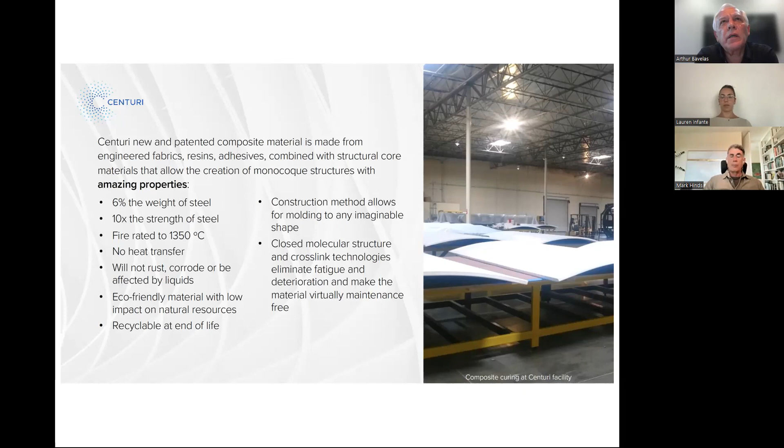Yeah, so in a container, for example, you could have an electric motor generating a lot of heat, and you could have it within the container of this, and it wouldn't melt or burn or be hot on the outside. That's correct. Yeah, super interesting. Yep. Thank you.

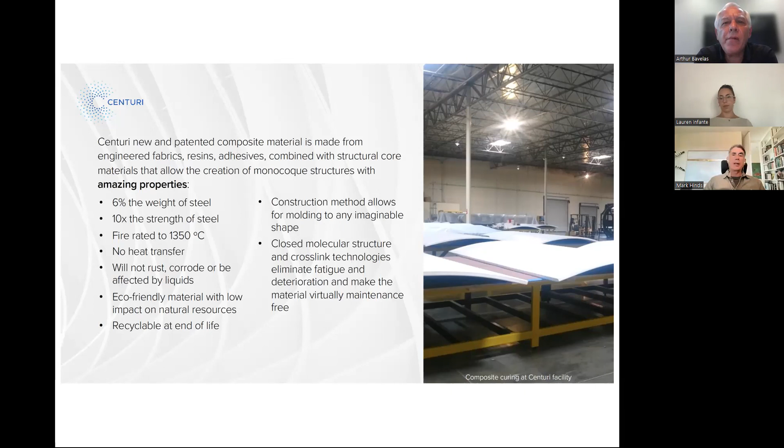Okay, and although we have many, many potential applications, I don't know who's on the call in your background, but I've been working with these really extraordinary minds and helping develop technologies for almost the last 20 years in various applications. And the number one challenge is always, we can keep inventing, but unless we really focus and get something to market, then it doesn't make a whole lot of sense.

So although here we list 4 things, right now we're really focused on 3: the wind turbines, the housing, and the construction. We have a lot of interest in the marine, but it just takes a lot more energy and resources. So we're going to do that a little bit later, but you'll kind of see as we go. I just realized that this may not be fully embedded in here, but maybe when we're done with the PDF, I'll load this wind turbine in a video so that you can see it actually working. So this is really a pretty extraordinary technology. So this is our wind turbine.

It's a little difficult to see in this image, and it's making me think that we should probably do a 3D cutaway. Just thought of that. But what you see is that there's that middle part, which has the skeleton in it, and that's sitting in a ring at the top and then a ring on the bottom. And then the top and the bottom both have electromagnets and coils in them.

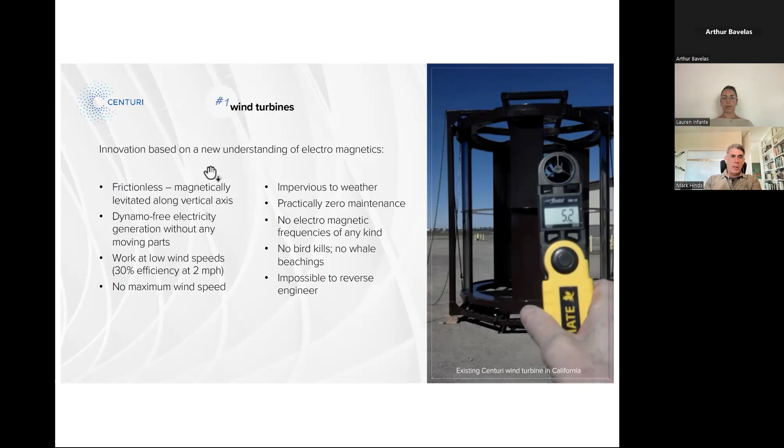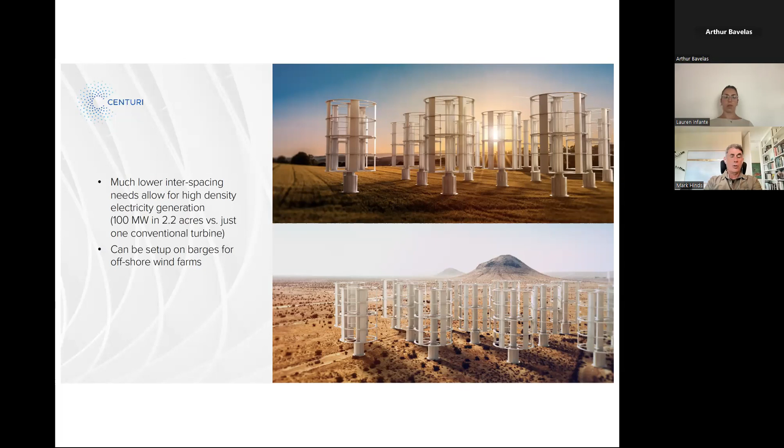Now, these are all artist renderings. This has not been built, but I think I shared a little bit earlier that the density of this is just radically different than anything that's been done before. In 2.2 acres, we could have 100 megawatts. And also interesting, since there's no metal, there's nothing to corrode, there's no moving parts, it's the perfect one for oceans. There's no back EMF, so it doesn't harm the whales. It could be put on barges, offshore. It really completely changes everything that we understand about the potentiality of wind as an energy source. So, yeah.

And I'm going to go through this super quick on number 2. I'm not going to spend a lot of time on it. But importantly, the one thing I did want to show is that was an 82-foot all composite commercial catamaran. We built that fully to basically show how the composite could work in the harshest environment in the world, which is an ocean. And you can kind of see how insanely light it is. In the bottom right-hand side, you've got one little crane holding up the entire vessel.

We've also built a couple things that I can't share a whole lot about with a government agency with the composite and an ocean-going vessel. We have a huge demand for it, but it just takes massive amounts of floor space. In regards to how fast we can do it, we're focusing on the other three first, but just to show some things that we've already built out of the composite.

And so this is the other thing that we're focusing on, which is the composite used for a shipping container. So we've built a 20-foot and 40-foot shipping container, and we've had it tested. And they do what's called a drop test from 4 feet, 6 feet, and 10 feet, and basically no damage.

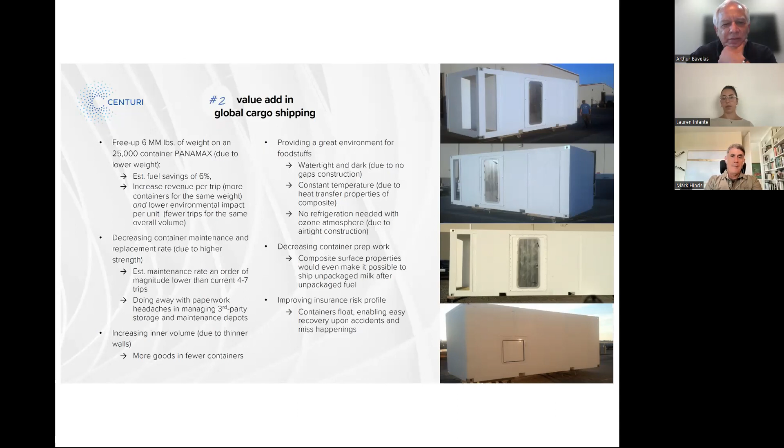Yeah, it's fascinating. There's only a couple people in the world that make those little things, and every one of them has a number stamped on it, and it's registered, and it's insured by Lloyd's. So as you can imagine, it's a bit of a process going through that. But yeah, sure. So that's the shipping container.

And then the third is housing. So that's the house that we built in the bottom left-hand corner, and then in the middle of the right-hand corner. And you can see how light it is, that a little crane is lifting the whole house. I think it took us 2 hours to set the house up. So it got set on the piers, we bolted it in. And then I think one thing that's pretty cool to witness here is that on the second image, on the left-hand side, all of the white things we bought from a vendor, but the flooring, the walls, all of that is the composite material.

So the composite can be made to look like anything, just depending on the texture of the form. It can look like wood, it can look like brick, it can be smooth, like if we want it for a ship or a shipping container. So we can have the material look like anything, and then we can include a color or a paint in the resin, and so basically it would never have to be painted for probably 40 or 50 years. So that bottom left-hand corner, it looks like wood, but it's our composite with a particular texture and a particular color.

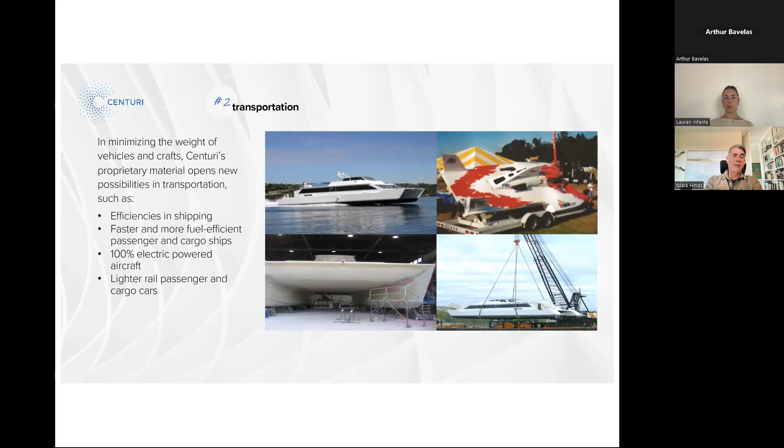We're pretty sure it's the best material on planet Earth by a very, very large margin to build houses from. And one thing I probably should have mentioned, going back up real quick to the transportation, which is one of the reasons that we're getting massive amounts of interest, is that we can also make the hull anti-fouling. I did not know this until about a year ago, but all the fouling material that builds up on hulls of very large ships is one of the biggest environmental challenges there is, and also significantly decreases fuel efficiency. So that's the kind of things that we can do with the composite.

So of course, the house is pretty much fireproof, and it can be brought in one piece, put on either a flat platform or, like that little hillside, on piers, and it's put together in hours. That's the house that we've built, and we have a very significant amount of interest for it. We've actually designed a little part that would go on the back of the house, where we could have the inverter and everything in a little module, so it could be completely self-contained, also from a smaller turbine. You of course wouldn't need a megawatt for that. You need maybe 10 kW. So that's the tiny home.

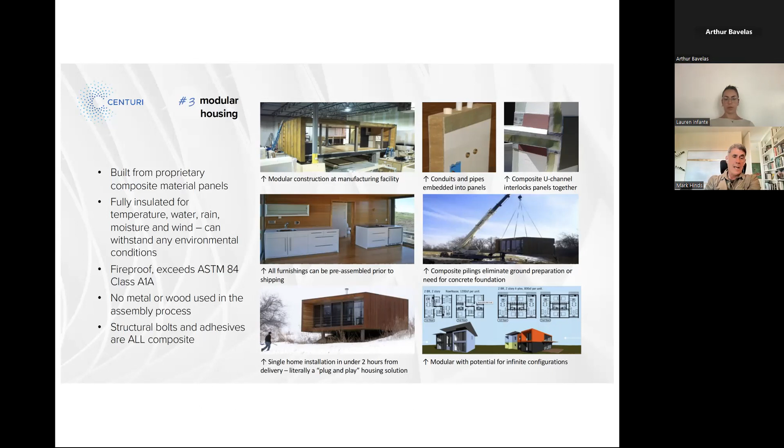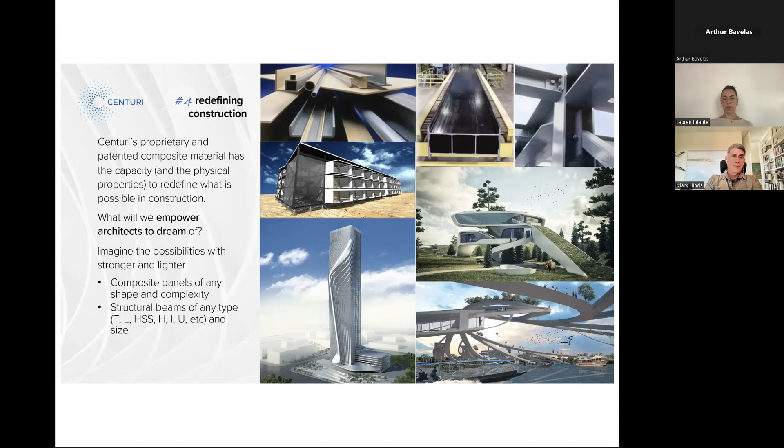And then the last application of this is actually in construction and building materials. Much of this is artist renderings, but the top images, the one in the middle with the little squares, that's actually a truss for a 40-foot bridge span that we recently built. If any engineers on the call looked at that, they'd go, that's impossible that you would have something that thin that would be certified to build a bridge from. And then also on this, let me see, is it on here? Oh yeah, we do.

So probably most everybody's aware that a couple of years ago, Australia had millions of acres burned from these fires that went everywhere. And so we joint ventured with a company out of Brisbane called King Composites. That's what we named it. And so we're now replacing millions of acres of fencing and gates and everything with the composite. Here's a good example. We're putting a yellow color in it so it can be seen. But it's non-conductive, so we can make it electric. It can't burn. There's a pretty cool video on King Composites, folks.

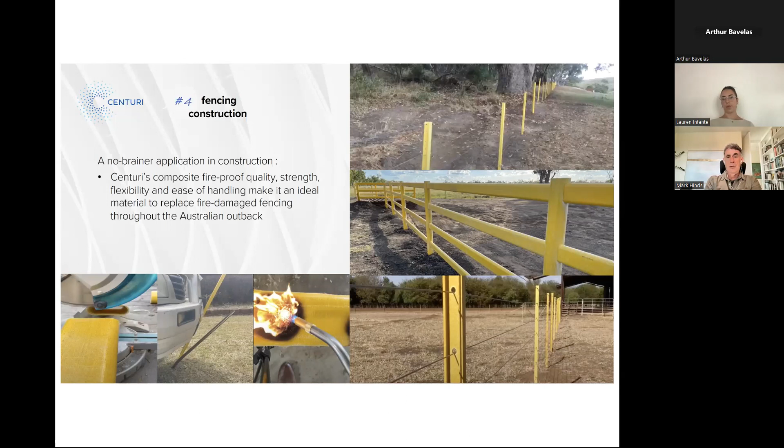But now this has brought us to the attention of many people in Australia, including the government, whereby they are just writing some rules that any new wind technology would have to be manufactured and deployed such as ours, with no transmissions, low maintenance, all of that. So Australia is going to become a very big market for us for many reasons. And now there's a pretty significant chain of hardware stores that want us to start making 2x4s, 4x4s, 1x4s, because it's better than wood and better than steel as a construction material. So that's happening right now in Australia, and that's showing the material being implemented.

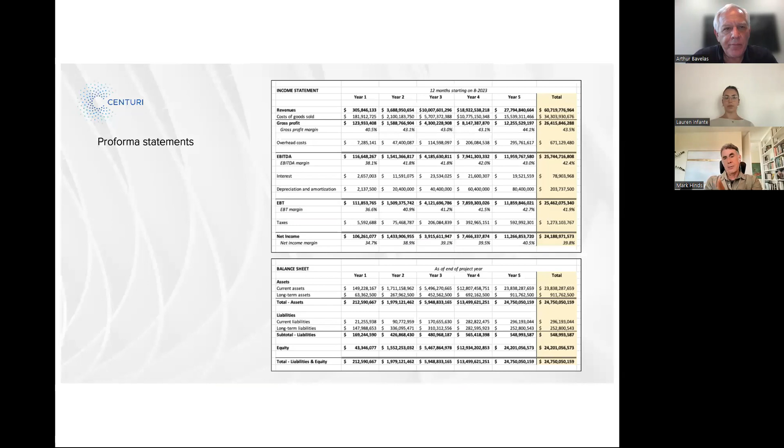And as it relates to the tiny home, I think this was a sample home that you built as opposed to taking orders for them now. Is that correct? Or are you taking orders? No, that's correct. We have interest. We haven't taken orders because we don't know for sure the exact final price. We know what the one we built cost us, but everybody coming to us would like a house that's about 250 square feet larger. So once we build it, we'll be able to tell people, here's the price, and then we can begin taking orders. The containers, we know the price. The turbine, we know the price. But on the house, we don't know the finished price yet. We have a rough idea, but we have to do a little bit more.

Got it. There's a question about the fencing. Is the composite fencing plant in Australia or here? It's not in either.

We've recently, I don't know if I have the little thing here. It's in Chinese, so I don't know if it matters anyways. But we recently received our certification, and I think you pronounce it Hainan, which is the trade-free port in China.

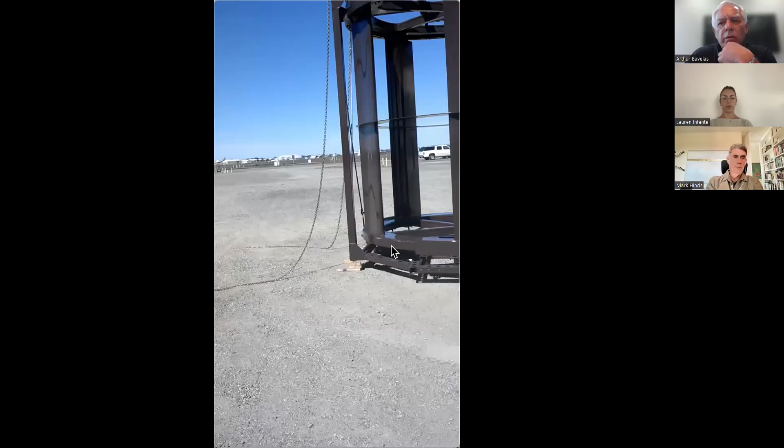So one last question. Does the material have any outgas? Oh, no, zero. No VOCs. Super interesting. Are you going to play this?

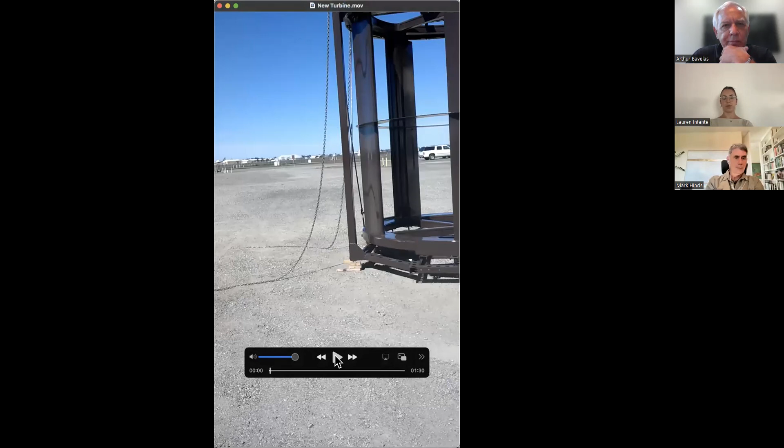Yeah. So here's the turbine. So again, the handheld device is a wind speed meter, and I think you'll see it goes all the way down to about 2 point something miles per hour up to about 14. And you'll see, I don't know if there's a lag time, hopefully not, but it's spinning at about 45, 50 miles per hour, which normal physics doesn't add up. But there you go.

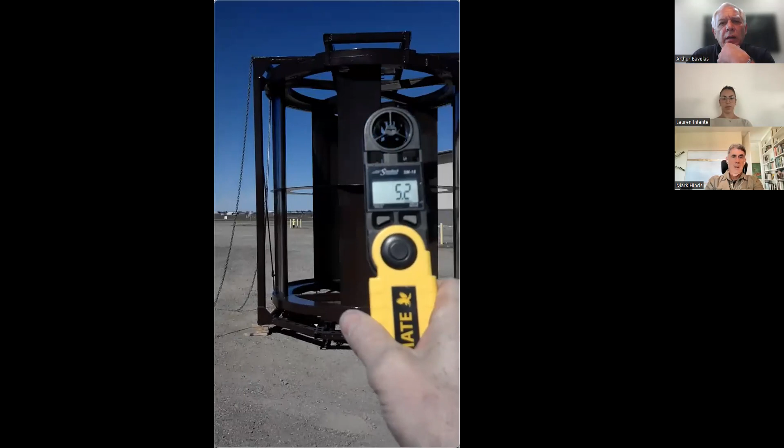So you can see you've got a turbine with a top ring and a bottom ring that is magnetically levitated inside of those. So there's no bearings. There's nothing to ever maintain. There's nothing to ever break down. And the 1.1 megawatt unit would just be about 10 feet taller than that and about 4 feet bigger in diameter. I'm sorry, you've got pricing on this at some point, right? Oh yeah.

So let's talk about the ask and the use of funds. Yeah. So what we know that we need to fully ramp up, two things. One is to finish our first facility, which allows all of the POCs to be done, all the proof of concepts. For that, we've designated a place in Ventura County, California, we have a building that we'd like to obtain as soon as possible.

In that, we'll build the 20-foot, 40-foot shipping containers, the 1.1 megawatt unit with the pole for the 2.2, and then the 840 square foot home. And then we have 2 potential locations, one in Las Vegas and one in Reno, where we can scale manufacturing. So for all of that, which would include the building purchase in Ventura, building leasing in the other 2 locations, and then equipment, inventory, and all of that, anywhere between about 26 to 30 million.

And so that's the ask, and that's what the use of proceeds are. Upon funding, it's going to take us about 90 days to outfit the facility, and then about 90 days to have everything ready to have all of the POCs, and then to begin converting all of the LOIs to purchase orders. So let's say about 6 months from funding. Got it.